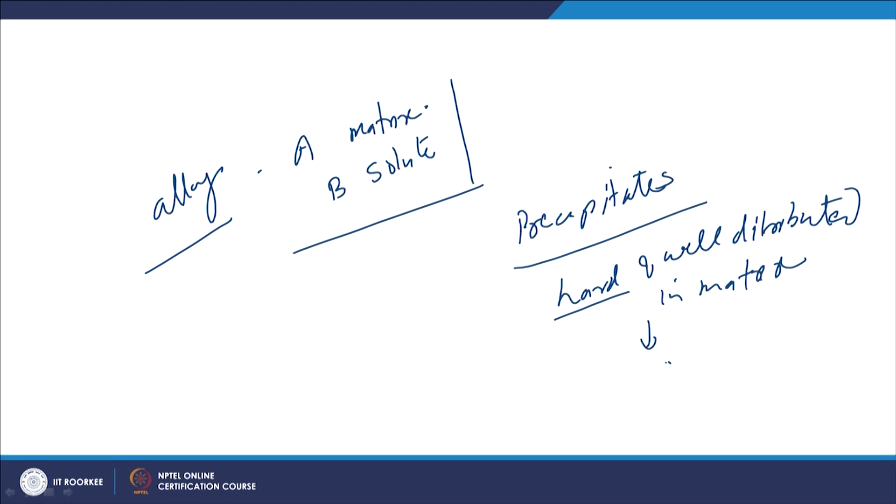So, let us understand first how does this mechanism work. Those metal systems like the alloys, A is the matrix and B is there as a solute. If B is having the solubility in A which is changing as a function of temperature, then it helps to offer the precipitation, it helps to develop the precipitates, and these precipitates, if these are hard and well distributed in the matrix, then these help significantly in increasing the yield strength and the hardness of the material.

So, the matrix having the fine well distributed hard particles in form of phases and precipitates, this kind of the fine well distribution of the precipitates helps in strengthening the metals. These kind of the precipitates are formed in certain category of the aluminum alloys, ferrous alloys, copper alloys, and the titanium alloys.

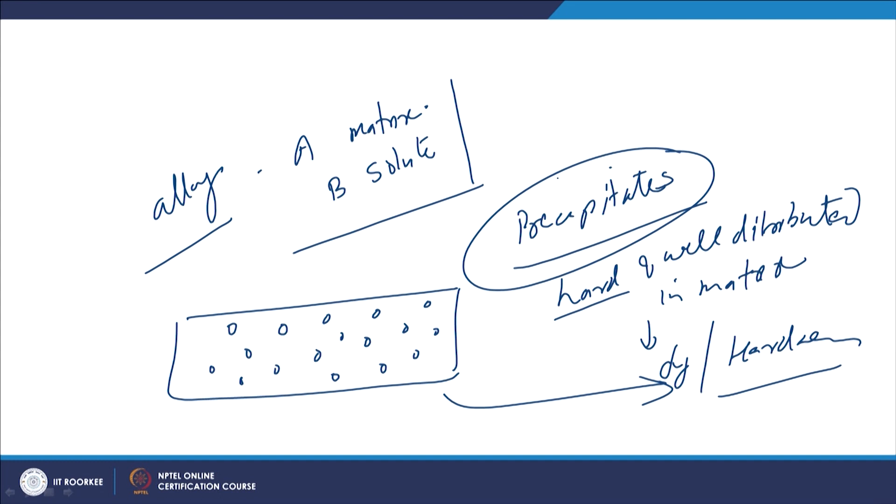So, if we see the details of the metal systems which can be strengthened by the precipitation strengthening, these are the aluminum copper alloys, aluminum magnesium silicon alloy, aluminum zinc magnesium alloy, copper beryllium alloy, magnesium aluminum alloys, and some of the ferrous alloys. And whenever we give the controlled heat treatment of solutionizing followed by quenching and then aging, then these fine precipitates as per the metal systems are formed, which in turn helps in increasing the strength and the hardness of the metal system.

Whenever these precipitates are formed, basically the mechanism which is helping to increase the yield strength of the metal is the increased barrier to the dislocation movement due to the presence of these precipitates. The mechanism of the strengthening depends upon the size of these precipitates. Like in a material, if the dislocations are moving, then the barrier to the movement of dislocation will be offered by these precipitates. So, if the precipitates are well distributed in the matrix, then there will be lot of resistance for the movement of dislocation, which in turn will help in increasing the yield strength.

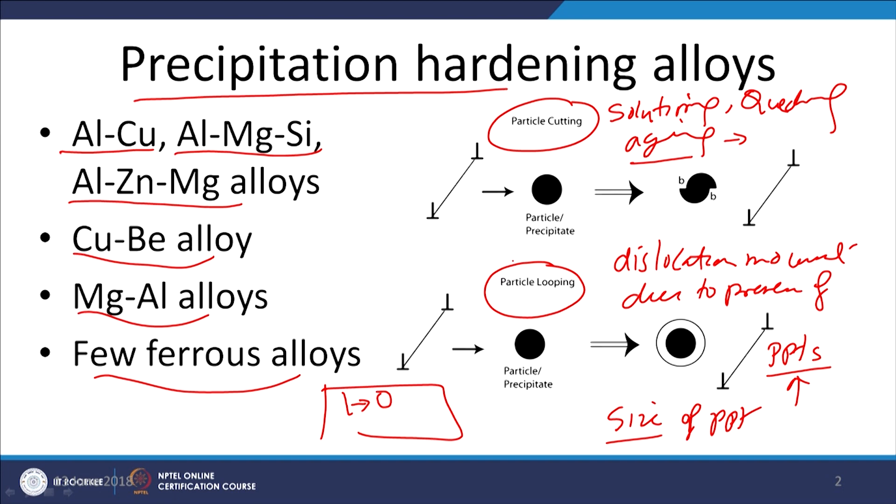There are two mechanisms which play a big role in strengthening of the metal strengthened by the precipitation hardening. One is the cutting of the precipitates and another is the bowing around the precipitates. So, both these mechanisms contribute to the strengthening of the material as per the size of the precipitates.

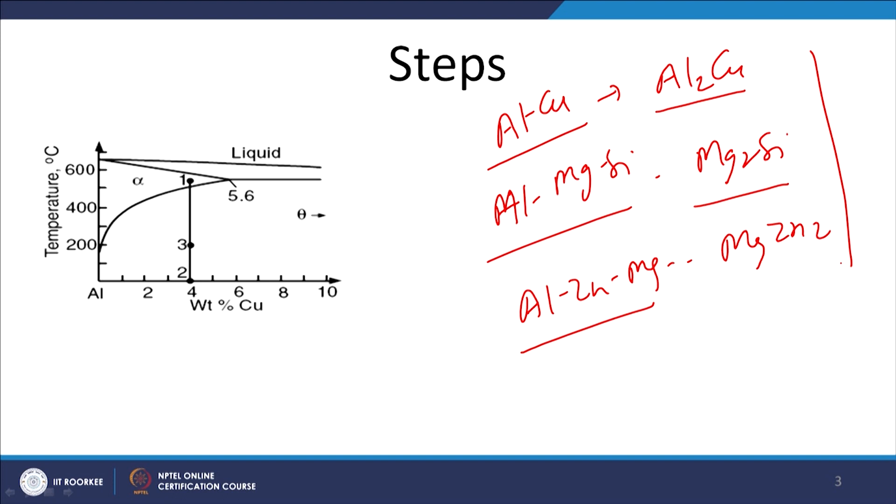There are different types of the precipitates which are formed as per the type of metal system. For example, aluminum copper is one precipitation strengthening metal system, where Al2Cu is one of the typical precipitates which is formed. In case of the aluminum magnesium silicon alloy, Mg2Si is the precipitate which is formed, and similarly in case of the aluminum zinc magnesium, it is the MgZn2 precipitate which is formed. And when these precipitates are well distributed in very fine size in the matrix, then these contribute in a big way towards the strengthening of the metal system.

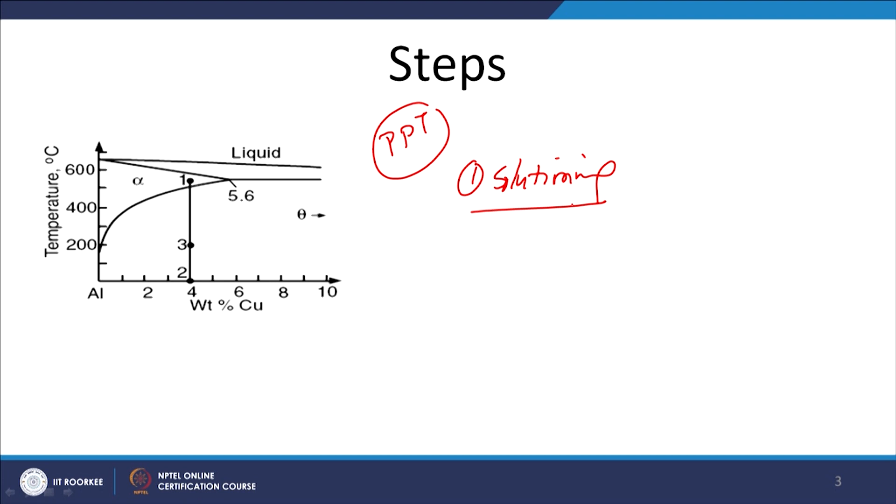For development of these precipitates, there are 3 steps which are used. One is called solutionizing, where the alloy is heated to a temperature high enough above the solvus line, so that the homogeneous solid solution is formed. Thereafter, after the heating, it is quenched rapidly, so that we get the supersaturated solid solution, where the alloying element will be present in the solid solution in an amount much more than its ability to get dissolved. That is why it is supersaturated solid solution.

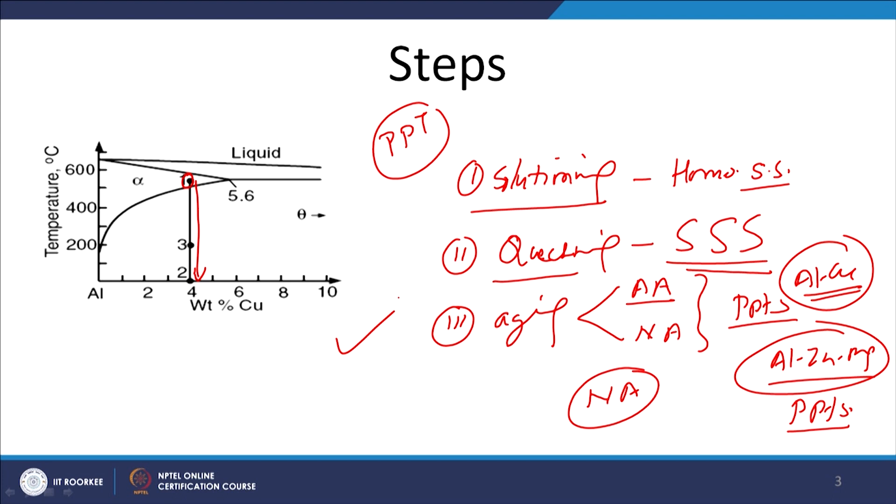So, these are the 3 steps for strengthening purpose, and now we will see what are the different precipitates formed. So, as I have said, as per the size of the precipitates, there are different strengthening mechanisms, or different ways by which the movement of dislocations will be restricted.

So, as far as the contribution of the precipitates with respect to their size is concerned, what we will see is that when the particle size is small in this band, the bowing of the dislocations around the precipitates contributes in a much bigger way towards the strength as compared to the cutting, while when the particle size is big, the movement of dislocation through the cutting of the precipitates accounts for a much higher increase in strength with the large size particles. So, obviously there will be a combined effect.

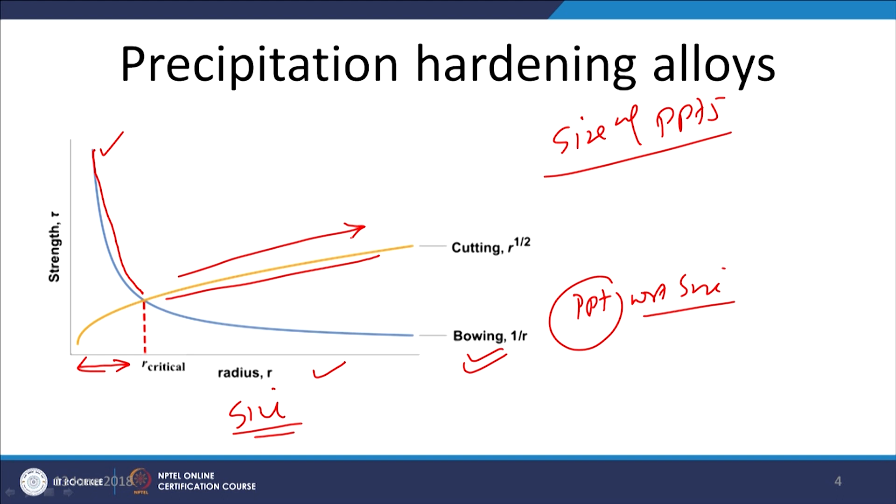If we see how the size is affecting, then for very fine size precipitates, there is a significant reduction in the strength due to the bowing of the dislocations around the precipitates, while in case of the large size particles, there is an increase of the strength. So, the combined effect of both these is what we can see in this diagram.

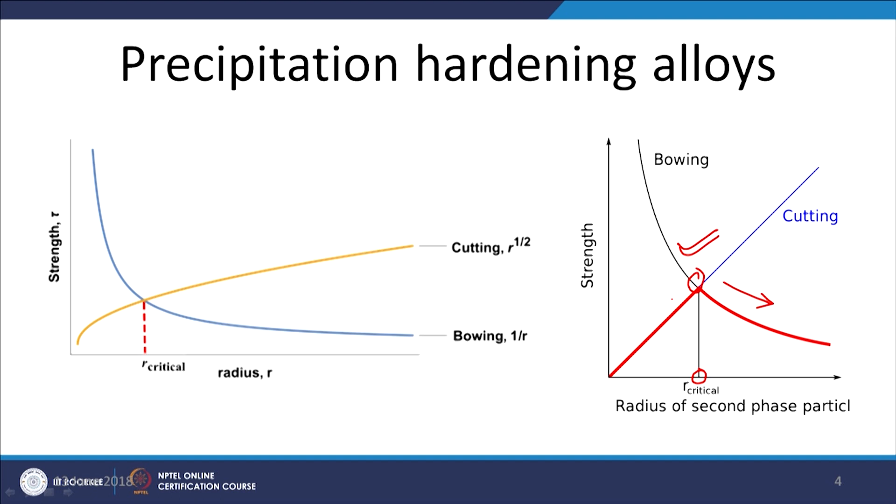What we can see, there is a particular critical radius at which both bowing and the cutting mechanisms will be playing a great role towards the strengthening of the material. So, this one will be offering the maximum increase in strength, and thereafter the large size of the precipitates will be leading to the reduction in the strength. So, this is the size range which we would like to have for peak hardening or the peak strength.

So, now we will see a typical example of the precipitation strengthened metal system like the aluminum copper system, where the CuAl2 precipitates are formed. These are named in different ways. One is like Guinier-Preston precipitates. These are stable as a function of copper content. These are stable up to this temperature. The temperature up to which these are stable can be shown by this line.

And similarly, the theta double dash phase, which is also known as GP2 phase, will be stable up to the temperature shown by this line as a function of the copper content. And then theta dash precipitate will be stable up to this temperature, and thereafter it will get dissolved.

So, how about the appearance of these precipitates? These precipitates are extremely fine in size, and that is expressed in angstrom. So, these are the precipitates we can see in the form of disc shape, of different diameters and different thicknesses like this. This is what we can understand. So, the finest precipitates are found in the form of the GP zone, Guinier-Preston precipitates, and then theta double dash precipitates, and for the larger size, the theta dash precipitates.

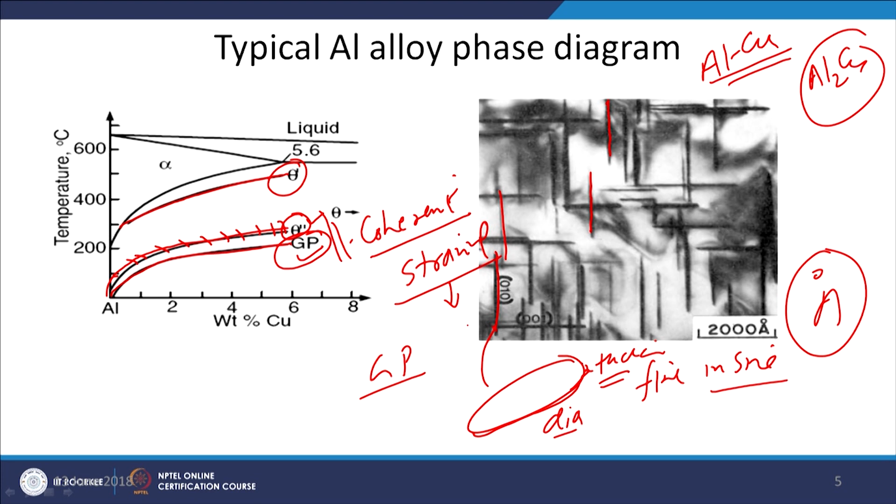And these two precipitates are perfectly coherent with the lattice structure in the solid solution, and that is why these lead to significant straining in the lattice structure, and therefore they contribute to increase in strength significantly by effectively reducing the movement of dislocations, while theta dash precipitate is semi coherent. So, its effectiveness for reducing the dislocation movement will be limited, as the extent of strain in the lattice structure induced by the theta dash phase is somewhat limited, and the theta phase is the stable phase which is incoherent.

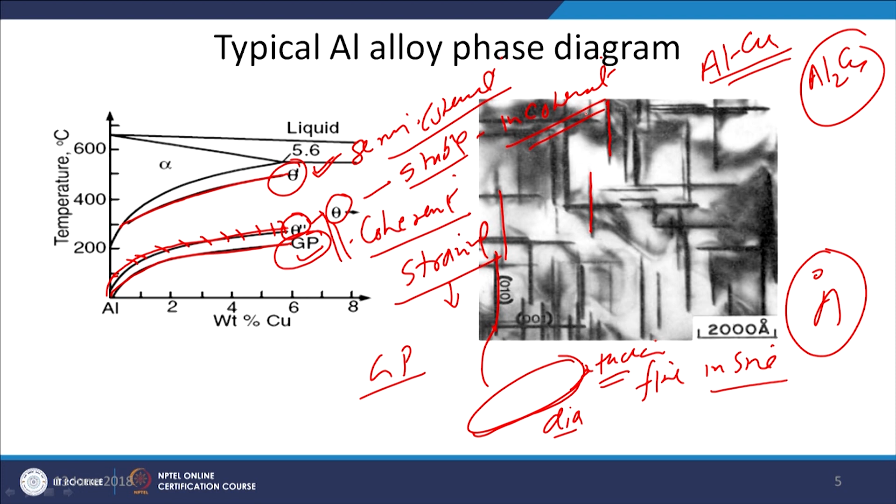So, its contribution towards the strength is limited because it does not cause much of the strain in the lattice structure in the solid solution of aluminum and copper alloys. So, that is what we will see.

The GP zones are coherent precipitates with the lattice, and these are extremely fine, 4 to 6 angstrom, and their diameter is 80 to 100 angstrom, while theta double dash precipitates, also called GP2, their thickness ranges from 10 to 40 angstrom, while the diameter ranges from 100 to 1000 angstrom.

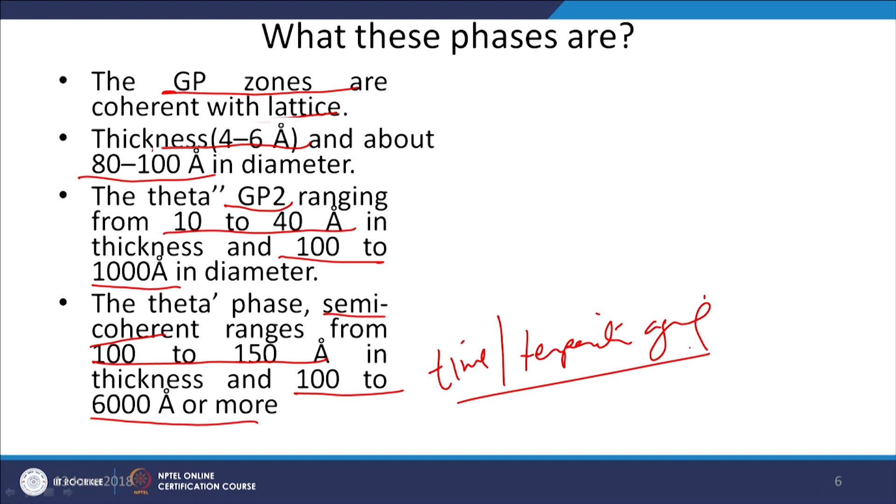And theta dash phase, which is semi-coherent, its thickness ranges from 100 to 150 angstrom, and the diameter varies from 100 to 6000 or more, depending upon the time and the temperature of exposure for aging which has been given. Now, as I have said, this is the solid solution, where in the matrix the solutes are present here and there,

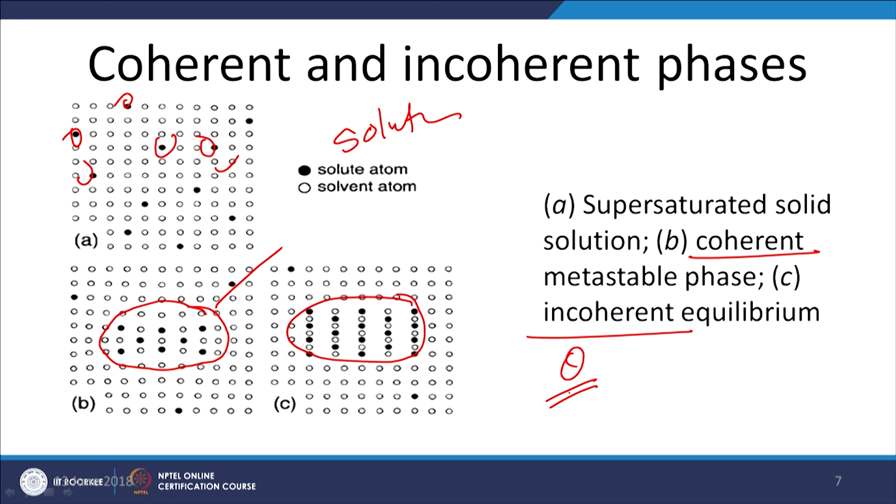and when the precipitates are formed which are coherent, then these will be developing strain in the lattice structure, which in turn helps in reducing the movement of dislocations, so that yield strength and hardness can increase. While on the other hand, when incoherent precipitates are formed, the strain in the lattice structure caused by such precipitates is very limited, and that is why the increase in strength by incoherent phases like theta precipitate in aluminum copper alloys is very limited.

So, we have to understand the way by which the increase in strength takes place during the aging process. During aging, as I have said, in the first stage a homogeneous solid solution is formed, then after quenching a supersaturated solid solution is formed, and in the third stage the precipitates are formed during aging. Aging can happen at room temperature as well as at elevated temperature. At a given temperature, the number of precipitates will be increasing as a function of time, and that will be leading to the increase in strength. So, that is what we can see here.

The supersaturated solid solution will have lower strength. This is the schematic of the supersaturated solid solution, where all solutes are well dissolved in the matrix and there is no precipitate, but gradually as a function of time, at a given aging temperature, precipitation starts, and it leads to the development of fine precipitates. Initially there will be few precipitates, and their number will keep on increasing with aging time, and a situation will arise when it will be peak aged, leading to the maximum increase in yield strength and hardness, and thereafter further aging at a given temperature will be leading to the coarsening of the precipitates.

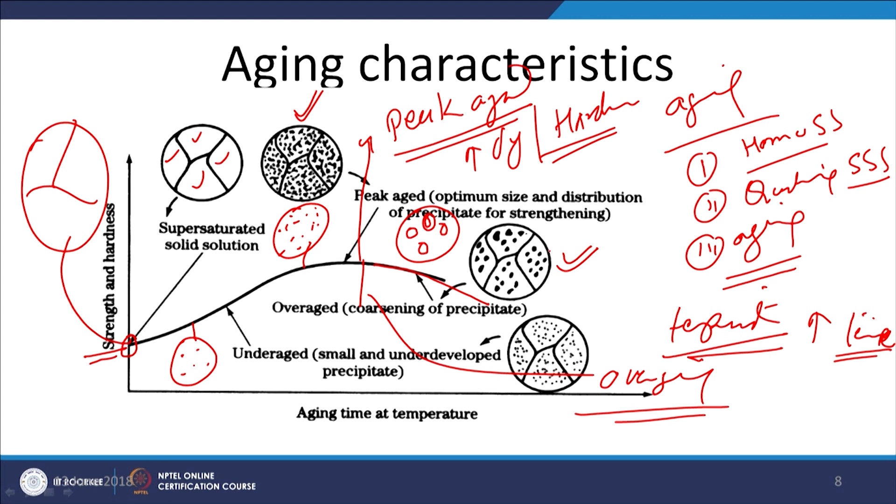By consuming the fine precipitates, the size of the precipitates will start growing, and when this growth starts, we will see the reduction in strength as well as hardness. When increase in the aging time at a given temperature starts coarsening of the precipitates, this leads to the reduction in yield strength and hardness. This stage is called over aging. In under aging, there will be few precipitates, although very fine; in peak aging there will be the maximum number of fine precipitates; and in over aging the coarsening of the precipitates will start, which in turn leads to the reduction in strength.

So, we will see the variation in the aging characteristic as a function of temperature for varying aging time. For this precipitation hardenable aluminum alloy, an aluminum silicon magnesium alloy with approximately 1% of both, after the formation of the supersaturated solid solution, when the system is aged at 120 degrees centigrade, the increase in strength takes place very slowly, and it takes a very long time to reach the peak strength.

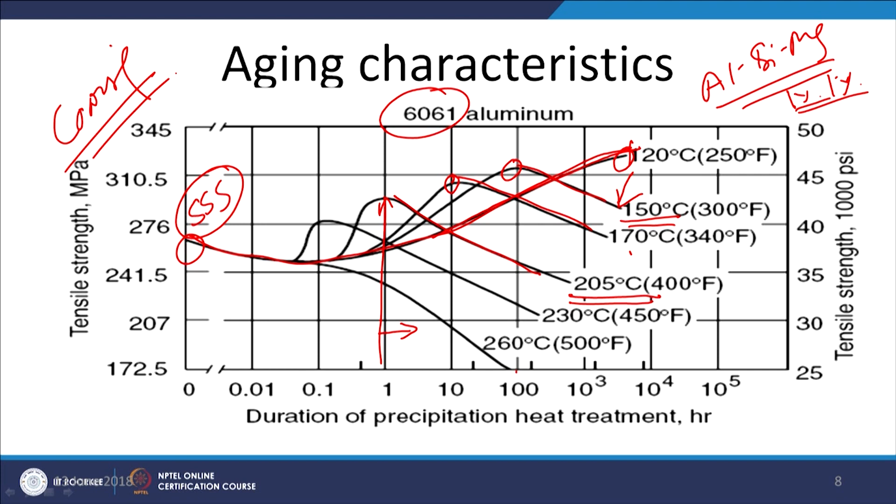Say the peak strength at 120 degrees centigrade was achieved after 1000 hours. When aging is performed at 150 degrees centigrade, it is realized at 100 hours. At 170 degrees centigrade, it is realized at 10 hours, and at 205 degrees centigrade, peak aging is reached in 1 hour, and thereafter the reduction in strength starts. So when aging is performed at 205 degrees centigrade, after 1 hour over aging starts, which means the coarsening of the precipitates, and that in turn leads to the reduction in strength.

So, these precipitates are subjected to over aging due to the application of the heat. So, what will be happening? We will be supplying the additional heat. So, obviously, part of the metal will be brought to the molten state, and part of the heat being supplied for melting will be transferred to the base metal. So, this will be causing the heating of the metal next to the fusion boundary, and this heating actually causes the over aging.

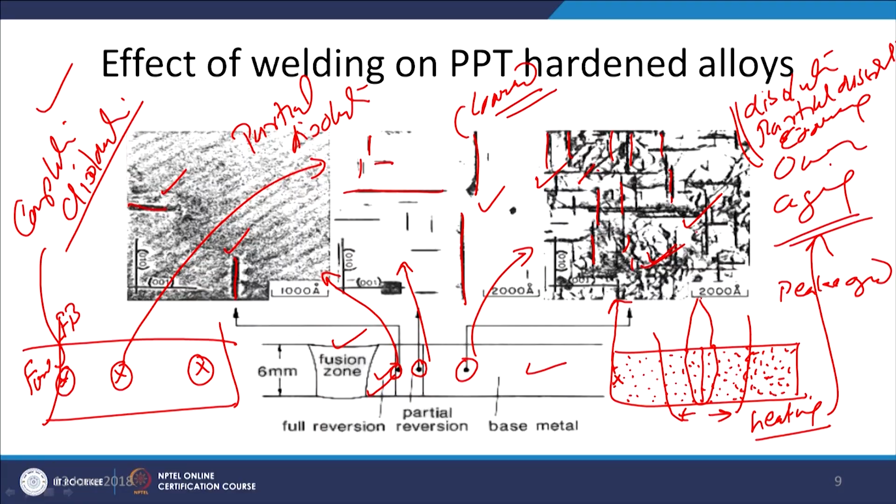So maximum loss of strength and hardness will be taking place next to the fusion boundary. Then on moving away from the fusion boundary, there will be somewhat lesser loss of strength, and further away from the fusion boundary in the base metal, there won't be any change in the hardness and the yield strength. So these effects we can easily see in case of welding through this diagram.

So if we take an example, this is the base metal and it has been joined by fusion welding. So this is the weld metal. The zone next to the fusion boundary is 1, this one. The zone slightly away from the fusion boundary is 2, this one. The zone further away from the fusion boundary is this, and the corresponding weld thermal cycles have been shown here, and the zone further away which is unaffected is this one.

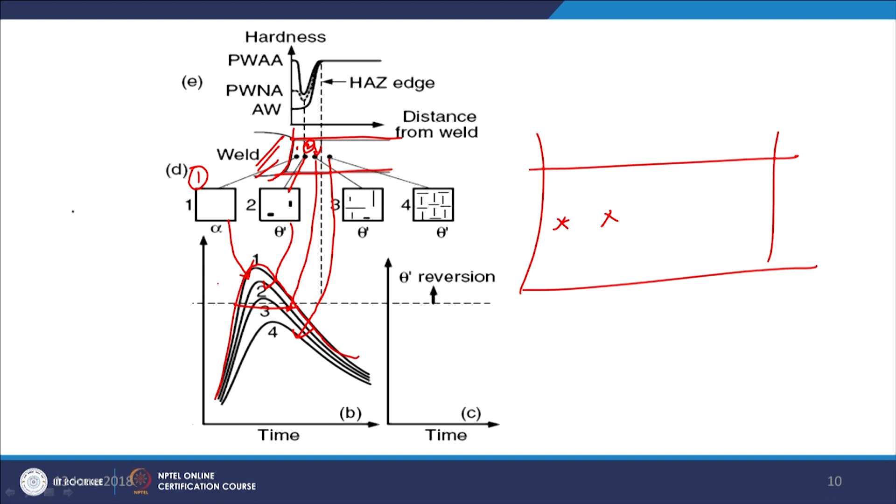So if we see the regions which are very close to the fusion boundary, they experience much higher temperature, and the high temperature exposure is there for the longest period, while the zones away from the fusion boundary experience lesser peak temperature, and for a shorter time. So the temperature and the high temperature retention period.

So the temperature is increasing and retention period is increasing as we move towards the fusion boundary, and as we move away from the fusion boundary, this peak temperature as well as retention period is decreasing. So the region which is significantly away from the fusion boundary will not be affected by the heat. So it will be showing the maximum density of the precipitates and the maximum strength, while the region which is slightly heated by the heat from the fusion zone will be experiencing the partial loss of the precipitates.

So accordingly there will be a little reduction in the hardness and yield strength, and as we move further closer to the fusion boundary, there will be further reduction in the number of precipitates and coarsening of the precipitates. This will lead to further reduction in strength, and next to the fusion boundary there will be complete loss of the precipitates. So it will be the weakest zone: the minimum hardness and strength will be observed in precipitation strengthened material in the zone next to the fusion boundary, because of the complete dissolution of such precipitates.

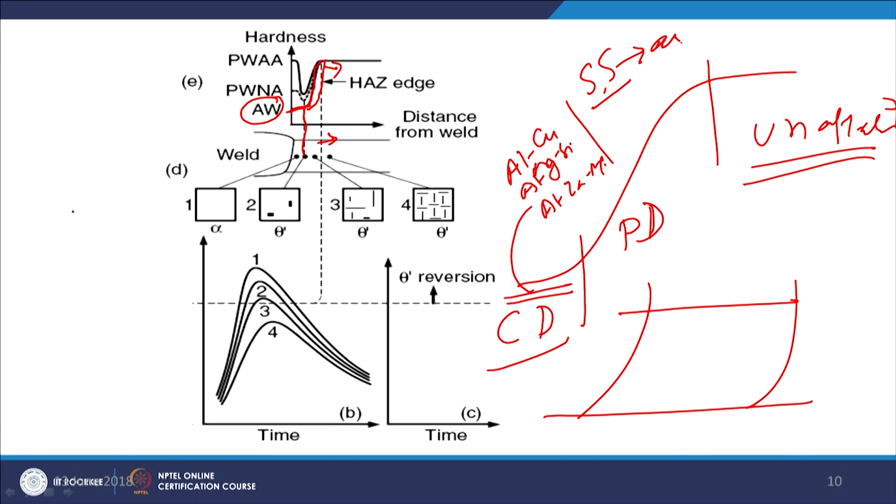Now the zone which has experienced complete dissolution, like the one next to the fusion boundary, will have aluminum-copper, aluminum-magnesium-silicon, or aluminum-zinc-magnesium in the solid solution state. So if the metal shows a tendency for aging after welding, we will notice the formation of precipitates in the form of Mg2Si or ZnMg2 again.

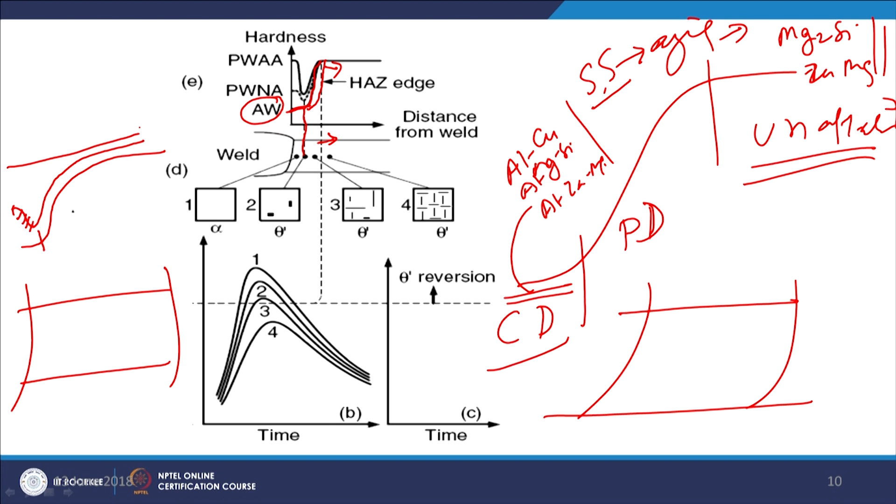Immediately after welding, the hardness next to the fusion boundary will be minimum, but after some time the zone next to the fusion boundary will start experiencing aging like this, and then like this. And if we perform artificial aging, we find that the hardness variation is by and large uniform and the strength has been restored. That is what has been shown in this diagram.

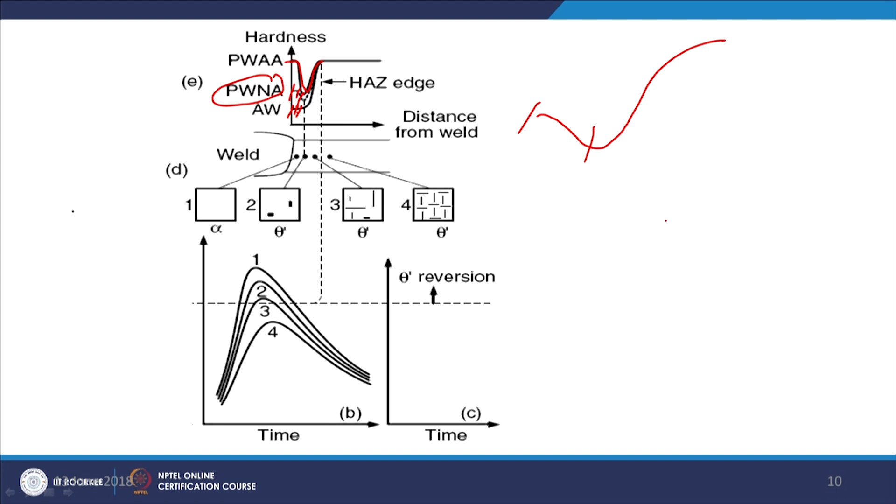So, if natural aging is performed, the region which has experienced complete dissolution will respond very rapidly to the formation of precipitates and show an increase in strength. This is the zone next to the fusion boundary. And in the case of artificial aging, the zone which has experienced partial dissolution will be subjected to over aging, while the zone subjected to complete dissolution will experience the formation of fresh precipitates.

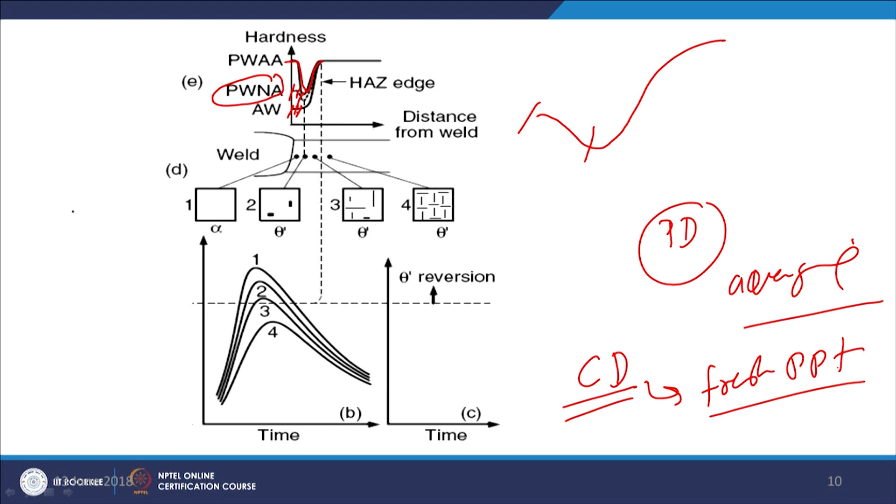That is why the zone of complete dissolution, forming fresh precipitates on artificial aging, shows the maximum improvement in hardness and strength, while the zone of partial dissolution is subjected to the over aging effect and shows a little dip. This little dip away from the fusion boundary is primarily due to over aging, and then again we have the maximum hardness in the base metal.

So, now I will summarize this presentation. In this presentation, I have talked about the mechanisms leading to the increase in strength of precipitation hardenable metals, and how precipitation strengthened metals are affected by the heat from welding.